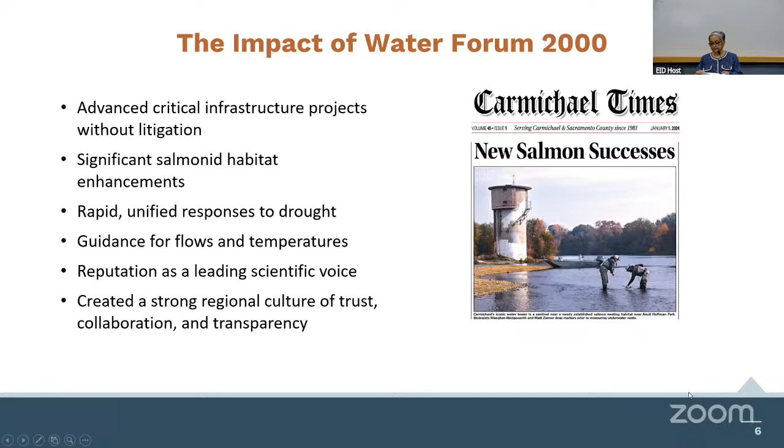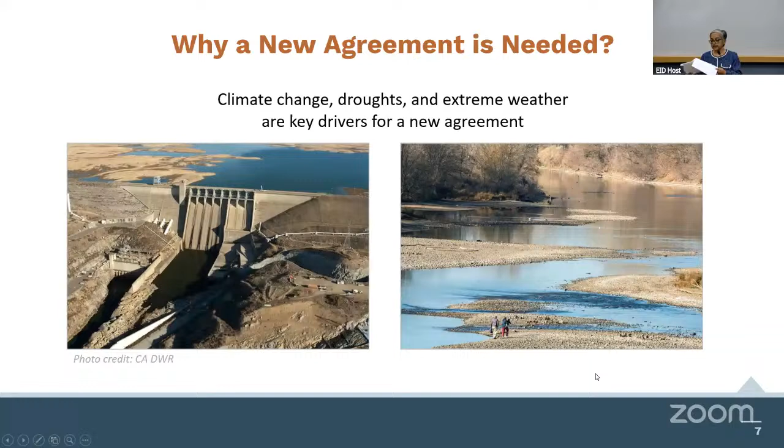Why a new agreement was needed: Climate change is reshaping our water reliability and river health. We have declining river flows and rising temperatures threatening fish and recreation. We have reduced reliability of surface water supplies for urban areas. There's greater risk of external claims on the American River water, and increased drying of soils and vegetation, stressing our ecosystems. Technical studies confirm the urgency of working through projecting more frequent droughts, earlier runoff, and greater risks to both water supply and river health, and this emphasizes the need to collaborate.

Growing pressures from new regulations and affordability challenges, groundwater sustainability, permanent statewide conservation mandates, and rising operational and compliance costs for water providers emphasize the need for this agreement.

The Water Forum Agreement commitments include habitat enhancement, flow management standards, increased conjunctive use, a foundation of funding success, and effective advocacy for commitments for regional coordination and water management.

The Water Forum's co-equal objectives provide a reliable and safe water supply for the region, and preserve fishery, wildlife, recreation, and aesthetic values of the Lower American River. Both of these are extremely important.

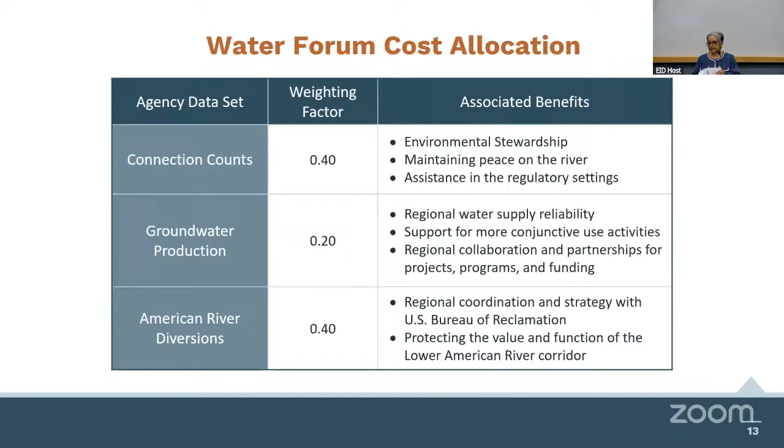The cost allocation that EID pays into is determined on connection counts, and funding goes towards groundwater production and American River diversions. Funding is factored on connection counts, groundwater production, and American River diversions, and to each of those categories are associated benefits. So depending on how EID is factored in, which is on connection counts, the associated benefit is related to environmental stewardship, maintaining peace on the river, as well as assistance in regulatory settings.

Since the original Water Forum agreement in 2000, the region has invested in major infrastructure projects without opposition or lawsuits. That is huge, a phenomenal success of the prior agreement. And the agreement creates trust and transparency amongst different groups, making it easier to respond quickly to crises such as the long droughts without lots of conflict.

Purveyor-specific agreements were created for water purveyors that achieved co-equal goals and acknowledged specific projects or purveyor goals.

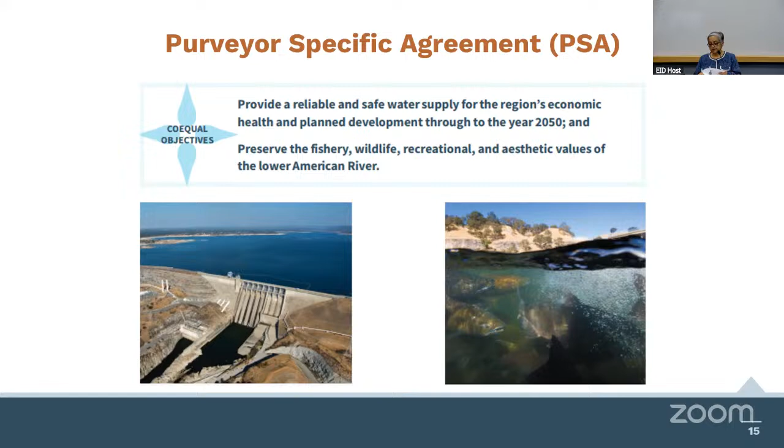The support for the Water Forum co-equal objectives include, under River Corridor Health, the Upper American River flow releases. For EID, that's the FERC Project 184, Healthy Rivers and Landscapes, and the Water Forum. Water Conservation, the Drought Action Plan, the Central Valley Project Restoration Fund, temperature control devices at EID's Folsom Lake intake, irrigation management system programs, and relying on the Cosumnes River supplies to the greatest extent possible.

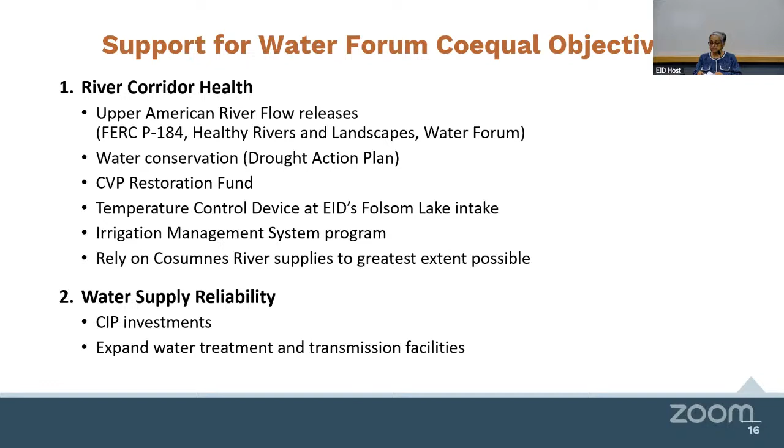Under water supply reliability, our CIP investments are included, and expansion of water treatment and transmission facilities. In support of the co-equal goals, potentially it provides transfer water in normal years, that's for groundwater recharge, and during dry years or the driest years, it meets the Lower American River demand. The sources are for reservoir reoperation or conservation. We also have a recycled water program that contributes to the co-equal goals objectives.

Under EID's commitments, we look at the Cosumnes versus the American River, and the district will rely on the Cosumnes River supplies to the greatest extent possible to meet our customer demands. Quantities available, dependent on watershed conditions and reservoir storage, can be used for transfers.

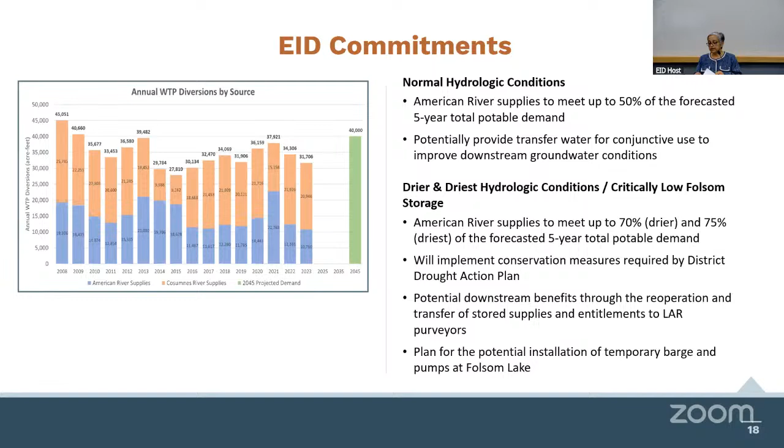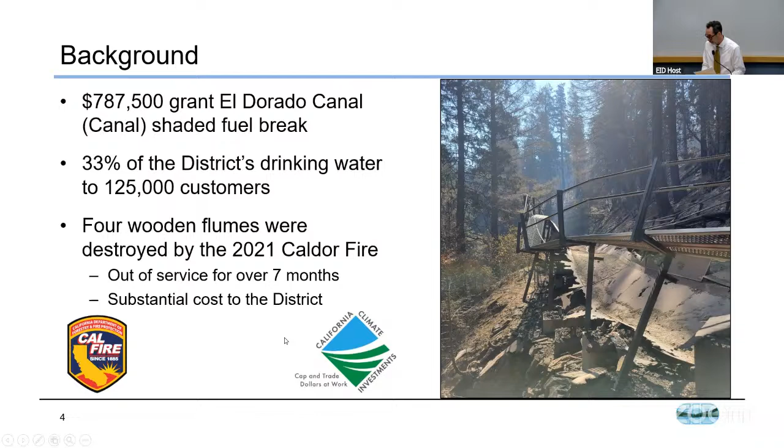A bit of context for today's item: the district was awarded a CAL FIRE California Climate Investments Grant for $787,500 in late 2023 to create a shaded fuel break along a 3-mile stretch of the El Dorado Canal. The canal is a critical piece of our infrastructure, supplying about a third of our drinking water to over 125,000 customers. We probably all remember the catastrophic 2021 Caldor fire that destroyed 4 of the district's wooden flumes, requiring over 7 months of around-the-clock emergency repairs to bring the canal back online at a substantial cost to the district—I believe in the neighborhood of $30 million in damages.

The El Dorado Canal Fuel Break project was designed to create a shaded fuel break along 3 miles of the canal. The project area contains our longest and most vulnerable flumes. The fuel reduction work included thinning and removal of vegetation up to 18 inches DBH (diameter at breast height), extending up to 300 feet on each side of the canal. This work tied into an existing Sierra Pacific Industries fuel break on the west and the canal burn scar on the east. The project is designed to help protect over 5,700 feet of wooden flumes.

I did a quick calculation—the actual flume length is 5,868 feet in the project area, about 1.1 miles. This represents... Can you go back to that? You bet.

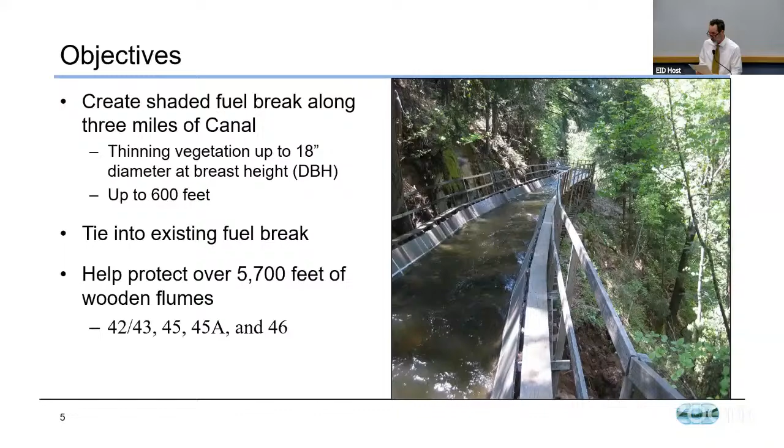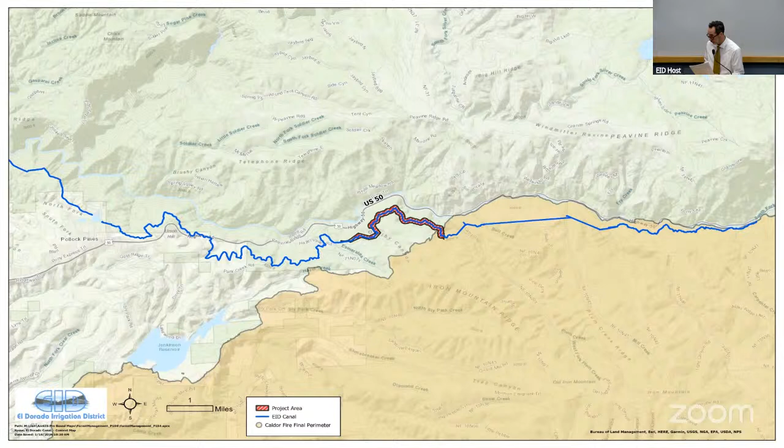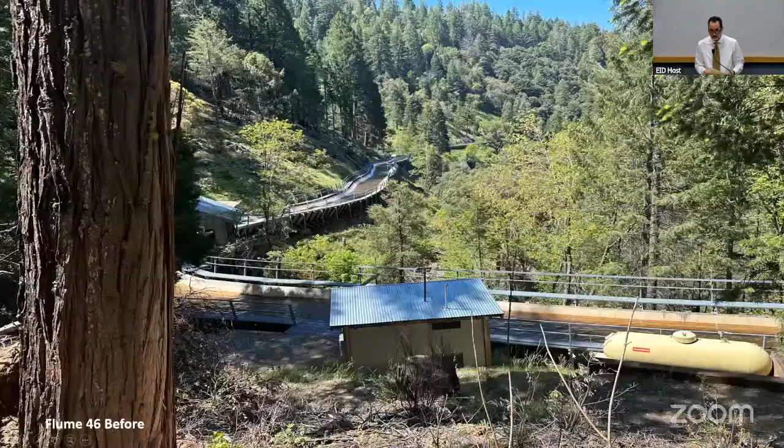This is flume 46 before the project fuel break treatments. It is our longest flume at 3,339 feet — that's roughly three-quarters of a mile. Again, this is before treatments.

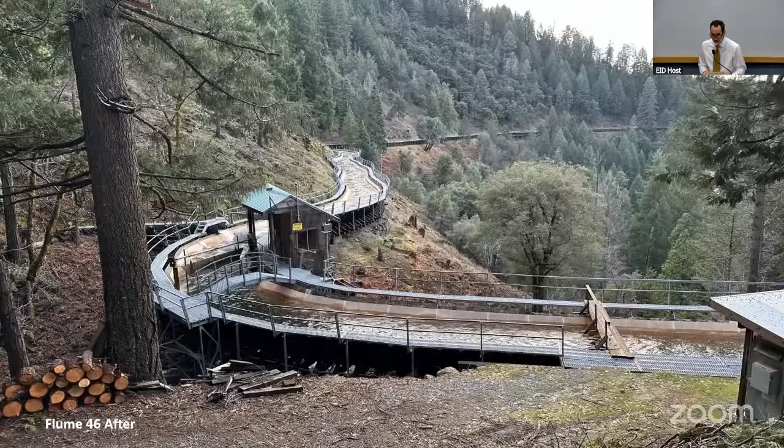We'll do this little slide dance here. And here we are after the fuel break treatments. One of the project's goals is not only to remove flammable material adjacent to the canal because it's safer that way, but also to make it clearly visible for our firefighters and air support in the event of a wildfire. You may remember the forest canopy was one of the reasons air attack was unable to see the burning wood and flumes during the Caldor fire. So this goes a long way to hopefully help that.

Would you mind going back to the previous slide so we can get one more before and after? So there's before, flume 46, and going forward. Before we leave this slide, that spillway shed in the middle with the yellow sign on it — we're going to see that shed from the other side of the canal, so remember that for a couple slides later.

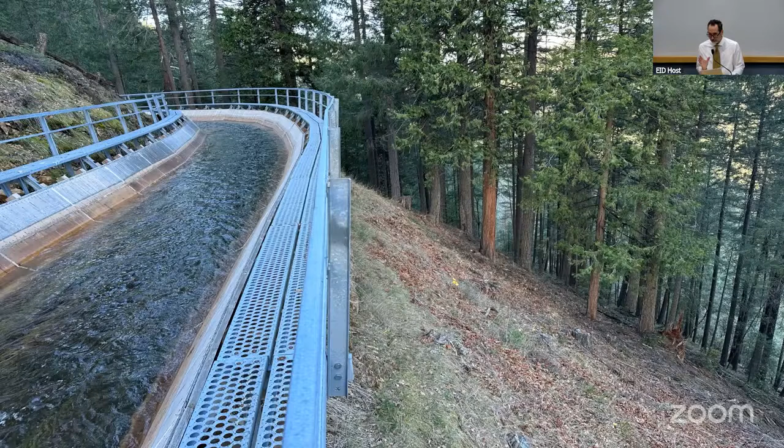Here's that same flume section from the previous slide, but looking from the opposite direction. I tried to remember to get all the same perspective, but when I got back to my desk, I didn't have all the same perspective, so it's the same area, just shot from the other side.

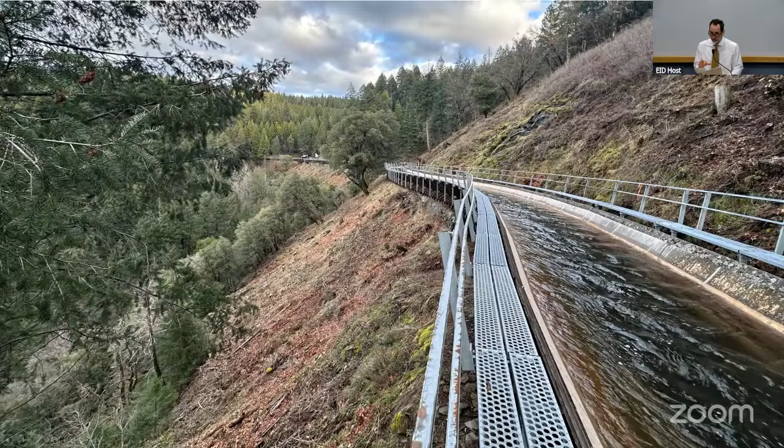Here's flume 46 again after the treatments, but viewed from the opposite side. If you can see right there in the middle left, that is the structure we saw before. You can see how the crews really did a tremendous job on both the up and down slope side of that canal.

The work included about 7 acres of mastication and chipping on the relatively few flat-ish acres that were out there.

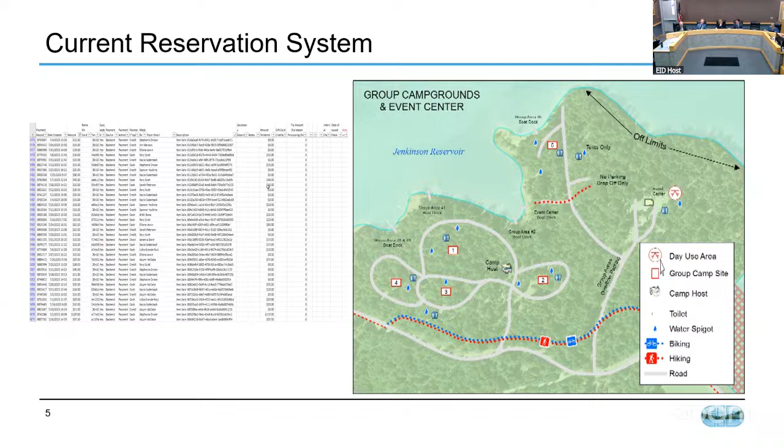I have a thing - it's kind of like if you go to the movie theater, you can pick your seats. Or if you've gone to almost any other campground reservation page, you can generally do something with the map rather than nothing.

So we put out a request for proposal last October. We received six proposals, and of those six, four were selected for a virtual interview: Campspot, Concourse, Let's Camp, and Vermont Systems.

Those proposals did not come in any sort of apples-to-apples fashion. Each proposal had a different pricing structure associated with it. So in order to allow staff to make the best comprehensive decision, we reached back to those respondents and asked them to submit, using some 2024 numbers, a cost proposal so that we could compare bottom line numbers.

And if you are interested, the numbers were a little over 7,300 reservations, 23,500 credit card transactions, and $1.65 million in revenue through credit card transactions. And you can see how the proposals lined out there.

Next slide. One of the things we're really looking forward to is that we're going to update our payment processing through this. Currently, 80% of our revenue does come through credit cards, either through the reservation system or in person, and previously the district has borne those costs internally.

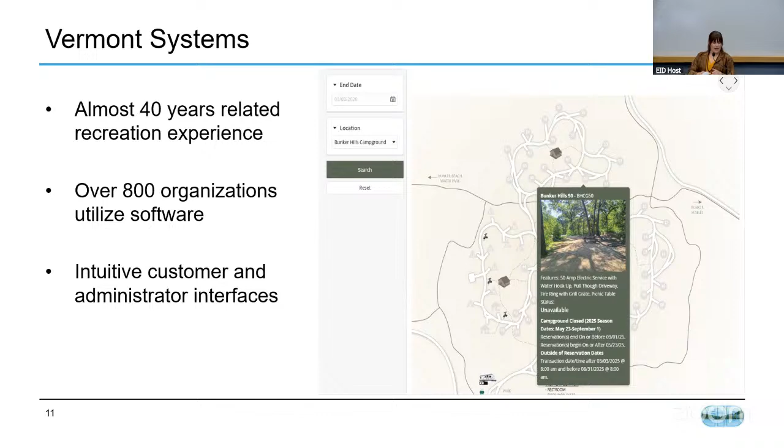Okay, and then on to the financial reporting. As the board is aware, the district is in the process of selecting a new financial software. This RecTrac, or Vermont Systems, is going to be able to

communicate directly with that software, and financial reporting will be able to be downloaded directly, coded into general ledger terms, which is really going to reduce that manual reconciliation and manipulation currently required by staff. That requires about 30 hours a month just for the reconciliation part, not even touching the time staff spend on the phone managing reservations. We're hoping to decrease all of that significantly and let him go back to other duties as assigned.

Board options: award a contract to Vermont Systems in the not-to-exceed amount of $60,000 for recreation, reservation, and point-of-sale system services for a period of 3 years, beginning February 1st, 2026, and authorize the general manager to extend the contract annually for 7 additional single-year periods if in the district's best interests, subject to the annual contract amount increasing by no more than 5% in each contract year, for the Recreation Reservation System Upgrade Project, project number 26012.01. Option 2, take other action as directed, or option 3, take no action.

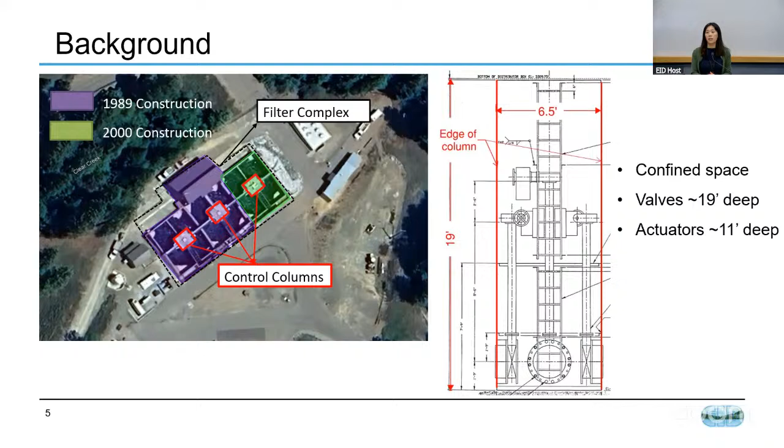Although originally the project scope was largely a valve replacement project, one interesting component of the work was that we were going to raise the actuators in clusters 1 through 4 and 5 through 8 from deep within the control columns to above the walking deck.

The way we were going to address that was to cut a cylinder surrounding the hatch, rotate it 45 degrees, and weld it back. That way we make space for the stems, and at the same time we don't have to redesign the hatch—we can keep the same hatch.

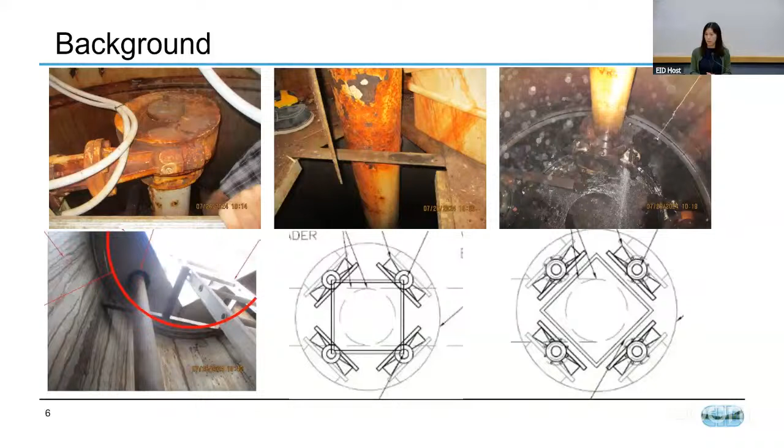One concern we had with that approach, although it's overall pretty innovative, was that the heat generated from cutting and welding may weaken the material strength surrounding the hatch. We wanted to make sure we would not negatively impact the strength of the material to a point that it becomes dangerous to operators.

So we conducted a specialized structural analysis on the control columns. But because the control columns are part of the distribution box on the filter, and everything is connected structurally, we ended up building a model for the entire distribution box for the clusters. The analysis showed that the concern we had for the control columns was nothing compared to the overloading stress situation we have on the bottom plates of the distribution box.

The analysis showed that in certain areas we have overloading scenario of 3:1 compared to allowed material strength. And that number, although maybe overly conservative, we have never purposefully or systematically gone out to look for signs of structural deterioration, such as deflections and major cracks. We have found repairable cracks in recent projects, though.

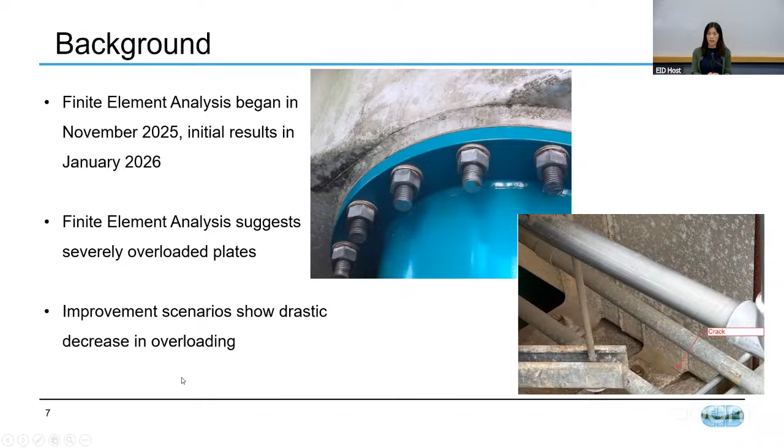At this point, this improvement obviously is not part of the original scope anymore. We are still finalizing some details on the design of these structural improvements, so the contractor was not able to provide a definite final cost for this change order. We put together a high-level estimate to inform the board of the magnitude of this potential change order.

That cost estimate included additional design, equipment, material, labor, and capitalized labor for district staff, and certain deduction from the bid items, which came out with a total of over $1 million.

The change order scope will be to add reinforcements on the bottom plate for all 3 distribution boxes to reduce the overloading stress from the weight of the water, and to add reinforcements inside the control columns for the 2 clusters where we are doing the rotating and welding.

Because of the magnitude of the change order, which is very much doubling the original bid price of $1.1 million, we did consider quite a few alternatives in terms of project scope and schedule. A range from sticking just with the original scope or only implementing some of the recommended improvements, to delaying certain portions of the work, and all the way to a complete filter rebuild.

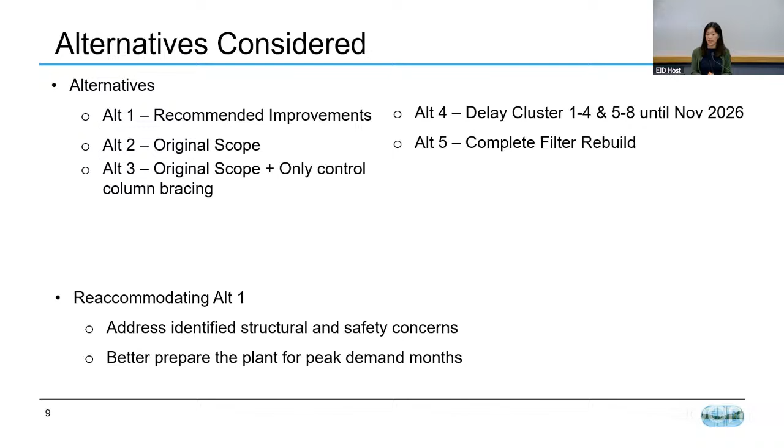So because of these 2 reasons, we recommend alternative 1, which is to proceed with the recommended improvements as part of this project.

I want to touch on the remaining work and a tentative schedule to illustrate the need for bringing this up right now at this board meeting, and the general manager delegation. Right now we have work on clusters 9 through 12 completed, and we're going to begin work on clusters 5 through 8 the beginning of February, which is next week. That work will take about at least a month and a half, bringing us to mid to late March.

Currently we have a deadline to return all filters online, which means we have to stop work and exit the work area by early April. Between that date and the fact that the next board meeting is not until February 23rd, we felt the need to bring this up right now to ask for a sequenced approval, where we get approval on funding at this point, and then have the general manager execute a change order when the pricing is reviewed, negotiated, and finalized.

If we were to give an extension into mid-April, we may be able to do some partial structural work for the next cluster, but that depends on the water demand trends. Overall, we will have to come back next winter to finish up clusters 1 through 4.

In addition to the change order execution delegation, we're also asking for delegation to the general manager to authorize about $200,000 of funding estimate for this change order, because the information we had at the point of estimate was very high level.

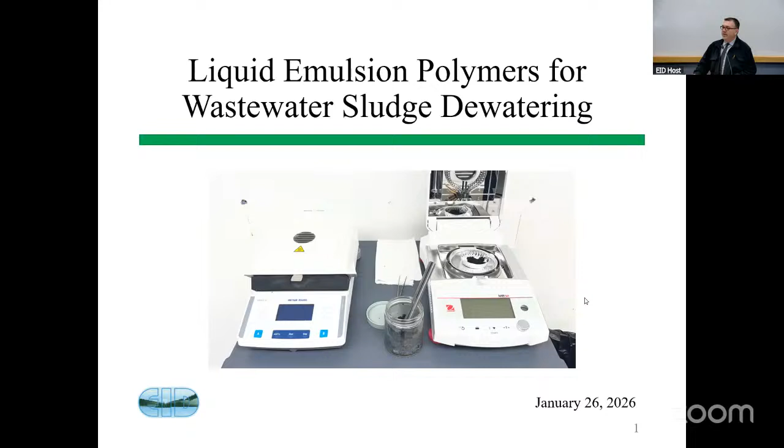This morning we're discussing liquid emulsion polymers for dewatering wastewater sludge, and the finished product is also known as biosolids.

Previous board actions: in 2020, the board approved a 1-year contract with up to 4 extensions for the purchase of polymers that resulted from the previous dewatering polymer trials. As I'll explain, because polymer trials are very time-consuming and require close coordination between operations, maintenance staff, and vendors, multiple extensions are desirable.

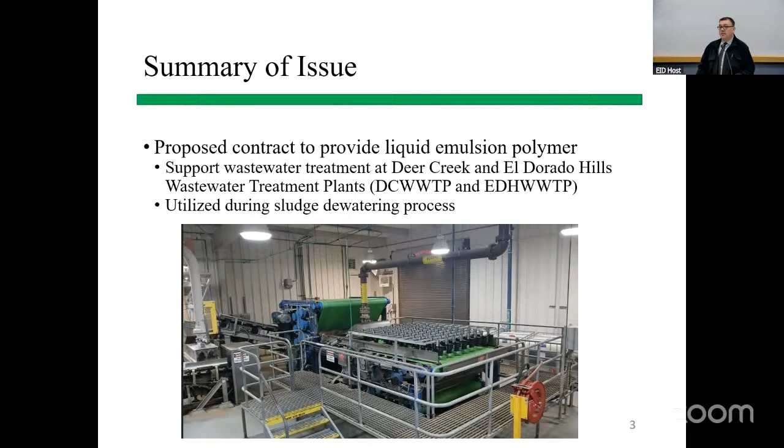Summary of the issue: staff have recently completed the newest round of polymer trials and are now seeking board approval for contracts to provide liquid emulsion polymer for the Deer Creek and El Dorado Hills wastewater treatment plants.

Background: biosolids are nutrient-rich organic products generated from the removal of organics from wastewater during treatment. During treatment, microorganisms break down organic solid waste. The solids are then dewatered, producing biosolids. The dewatering process requires the addition of a liquid emulsion polymer to bind fine particles into larger particles so they can be removed during mechanical dewatering.

Polymer trials are conducted to ensure that the district utilizes products that provide reliable performance and deliver the best overall value. Because polymer performance directly impacts biosolids production, hauling cost, and operational stability, the trials are structured to evaluate the product under real-world, full-scale conditions. In September of 2025, an RFP was issued to begin the polymer trial process.

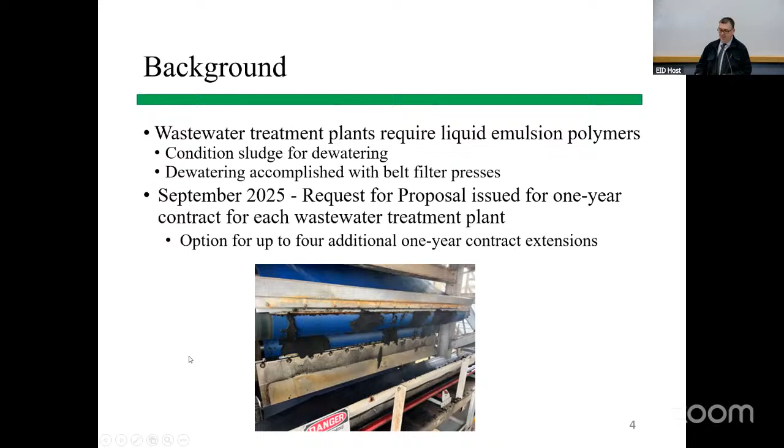So a little bit about the process. Vendors that had not previously supplied polymers already used full-scale in the facilities had to undergo a two-step qualification process. First, vendors come out and complete small-scale jar tests at the facility, where they do bench scale testing and figure out which of their products to advance to full-scale dewatering. Second, those products that show promise advance into the second round, and we gear up to do the full-scale trials to test them.

In October 2025, vendors completed the jar testing. They select their top 2 performing products, submit them to us, and also submit sealed bids for those products before the full-scale trial so that the prices are already in before we go through the trials. Then they arrange for enough of that product to get shipped to the facility, usually in a 55-gallon drum, so we can run a full-scale trial on it. I should say that although jar testing is essential, polymers that perform well in the jars don't always perform well when you introduce all the other variables into the process.

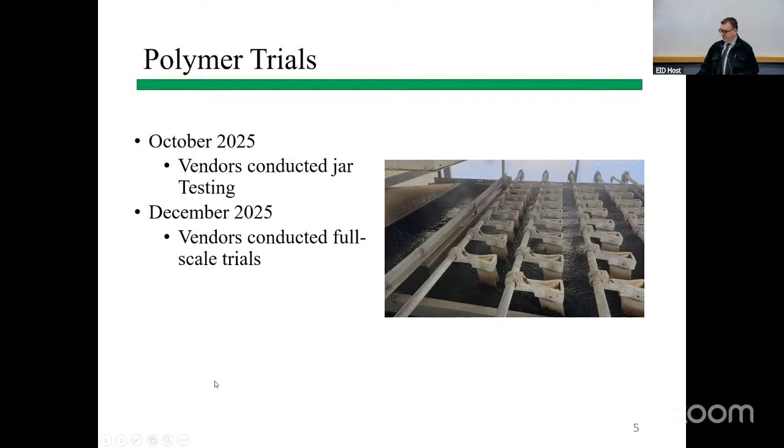So following the jar testing in December 2025, we moved into the full-scale evaluation of the products. So full-scale polymer trials.

I have a question. Go ahead. Are these new polymers, or is this some new composition?

If it's our existing chemical that's already being used full scale, it was exempted from the polymer trials. They can just submit a sealed bid on the product we're already using for the new contract. If they want to test different formulations, or other vendors come in that aren't currently in use, then they have to go through the two-step jar testing, then full-scale trials so we can compare. We did not test our current ones because we already use those full-scale in the process.

So is there any problem with them? No, it's just that every 5 years, when we go through the contract and bidding process, we're trying to make sure we get the best value for the district.

Okay, so in order to introduce competition and bring other people in, they have to come in and do some testing and prove that their products work. And it's kind of a complicated mathematical formula to figure out what the actual cost is. But then we can go through the whole process so we can compare apples to apples on each of the products and make sure we're getting the best value. Thank you.

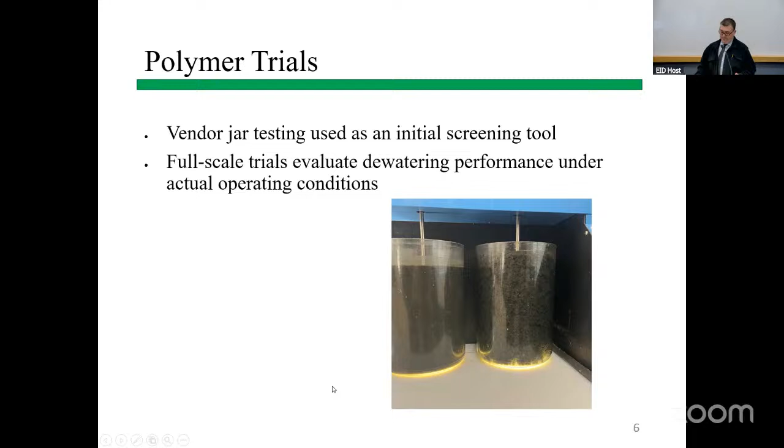So the full-scale trials actually do provide the most accurate evaluation of a polymer's ability to dewater solids under our actual operating conditions. Full-scale conditions introduce variables like sludge pumping, belt speed, compression zones, and behavior that can't be replicated on the benchtop. Next slide.

Full-scale trials require close coordination between operations and maintenance staff. Our maintenance staff have to thoroughly clean and flush the existing polymer system between each of the chemical trials to make sure it's working. Operations staff then connect the trials while the mechanical dewatering process stays in operation to maintain continuous operation of the treatment plant.

During the process, vendors are allowed limited adjustments when we get ready for the trial. They're allowed to adjust the polymer feed and blending system as well as belt press speed. All other operational parameters remain fixed, including sludge feed rates, and remain to our facility standards to make sure everybody's evaluated on a fair process.

During each trial, vendors get up to an hour to make adjustments before they say we're ready to begin evaluation. At the end of the hour, or when the vendor says we're ready to go, the evaluation period begins. Once that starts, no further adjustments are allowed during the evaluation period. During that period, district staff collect performance data, including cake solids content, solids capture efficiency, and the polymer feed rate, so we know how much we're using.

The RFP established minimum standards for solids capture and cake dryness, so you had to meet the minimum benchmark for your product to be considered. The overall value is determined by a weighted assessment of factors such as cost, achievable cake dryness, polymer feed rate, and our disposal expenses. Often the lowest cost polymer doesn't result in the lowest overall cost because it doesn't achieve as dry a cake or doesn't capture the solids as well.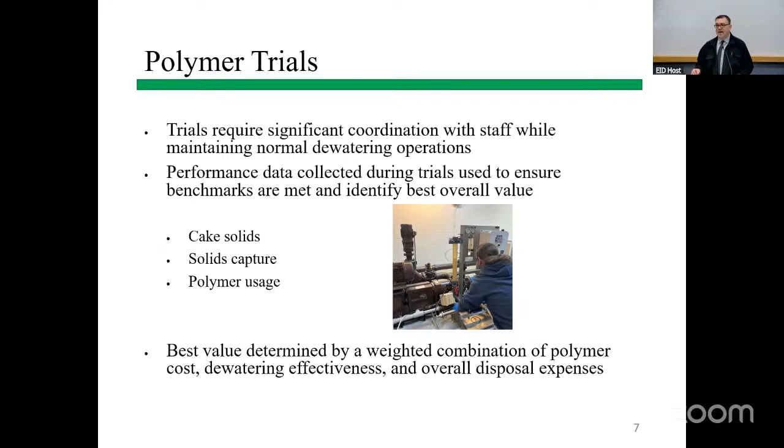So I have a question. That really indicates that we're going to have two different types of standards? They're not standards. The standards are all the same.

So the sludges are slightly different at Deer Creek versus El Dorado Hills. El Dorado Hills employs anaerobic digestion versus Deer Creek employs aerobic digestion, so the sludge quality is slightly different. Different polymers work differently on each of the two treatment processes. The percent solids and solids capture standards remained identical, they both had to meet the standards, but different products work better at one plant versus the other. Okay, thank you, makes sense.